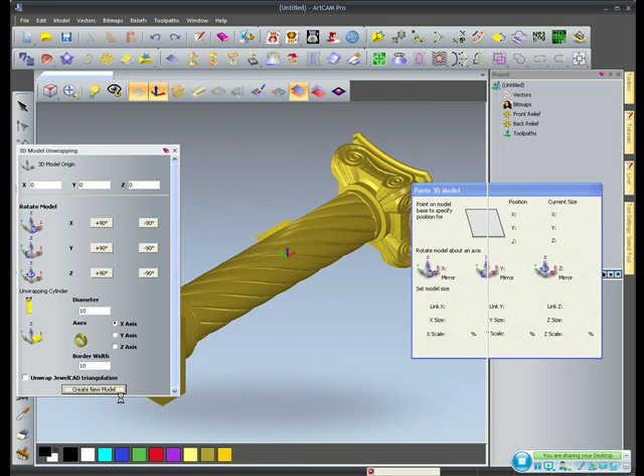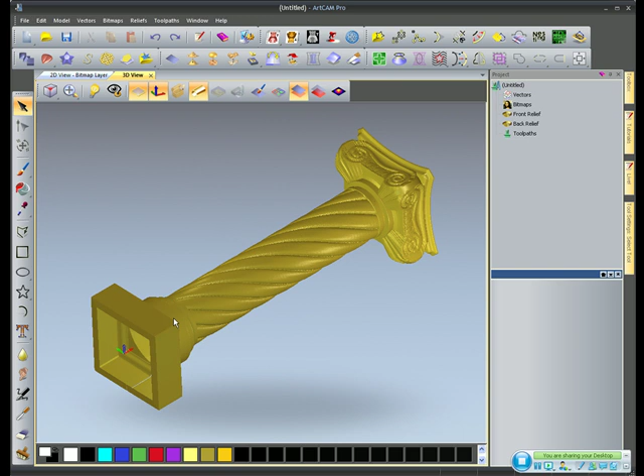What it's doing right now is opening up a brand new model at the size of the column. We're looking at the column unwrapped, as if it were sliced open and flattened out. It's very easy to quickly view it wrapped, and here we can see the wrapped column as an ArtCAM file, which is now editable and I can change it.

Now before setting up for machining, you might want to take a file like this and get customer approval. What we can do is set it up as we want to view it, and then we have some lights and materials that we can set up or change.

So I can choose to change how this part looks. What I can do inside of ArtCAM is change the different material types. There's all kinds of different metals, woods, and other materials as well, including a few marbles.

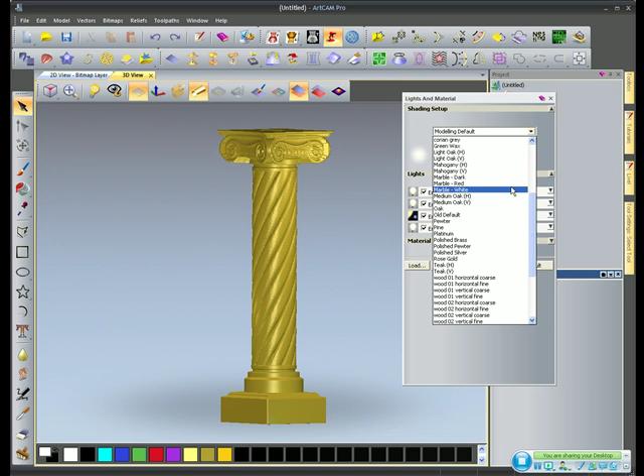For example, we have a red marble that we could set up. As you can see here, the red marble across this part. We also have a white marble.

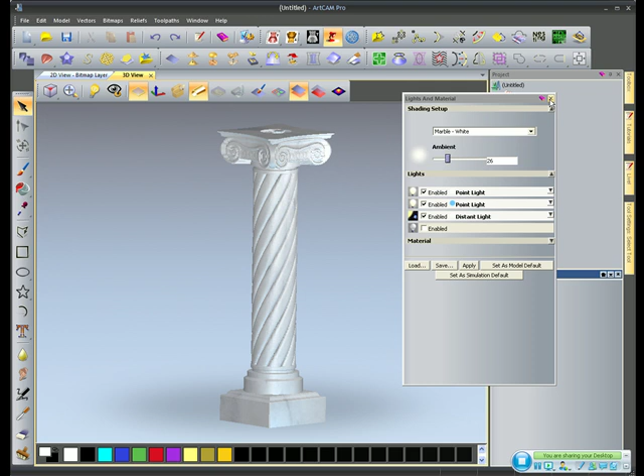Now say we want to leave it in the white marble. If you're happy with this look, and this is what the final product is going to look like, you can actually save this 3D piece exactly as we're looking at it right now as a JPEG, a bitmap, or a TIFF, so you can save it as a picture and send it to your customer for final approval before actually going through the machining process.

Another newer file type we can save out of ArtCAM is a 3D PDF. This is a fairly new file format given out by Adobe in the last year and a half or so. You can save this out as a meshed 3D PDF. Your customer can then open it, rotate it, and look at it from all angles, and zoom in and out. The nice thing is they can't alter or change the file, they can only look at it. So you can use this for approval before actually machining.

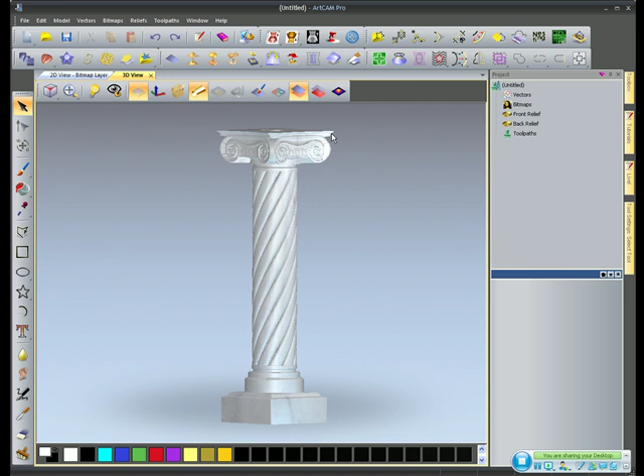So let's go ahead and look at the machining portion of this. As I said earlier, we're going to set this up for rotary axis, or 4th axis, machining.

Typically it's going to be set up like this on the machine, so it's laying horizontally, and you're going to have a spindle on either end holding the part in place. What happens is your tool comes straight down from the top, and as your part machines, the part actually will rotate small amounts at a time.

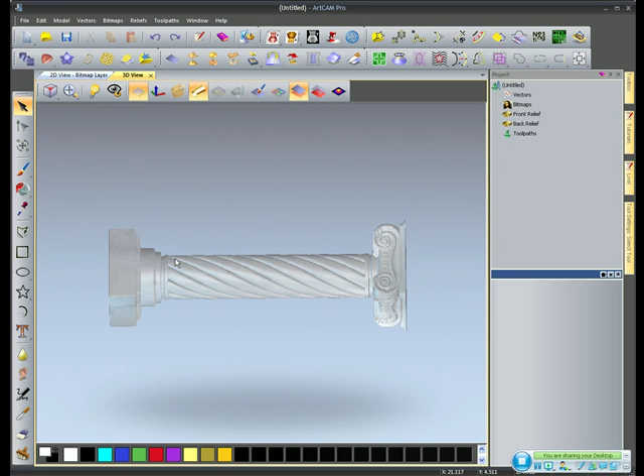So the tool will come straight down and go from one length all the way through to the other length, and then your part will rotate a small degree. And then the tool will come down again and cut the full length of the part. This is typically how you're going to set up your rotary machining. So let's set up that toolpath inside of ArtCAM.

ArtCAM's toolpaths are also fairly easy to set up. It's pretty much filling in the blanks. So I'm going to choose to machine here the entire model, the whole relief, set up a tolerance, and we need to choose a tool. We have an entire tool database to pick from. In this case, I'm going to select a fairly large ball nose. I'm going to select a 3/4 inch.

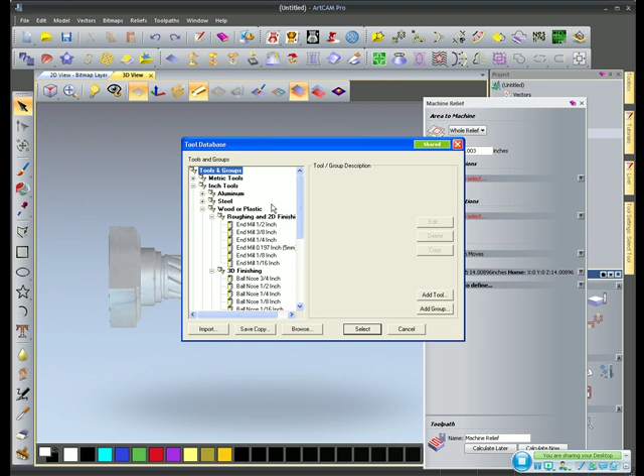The reason for that is this column is actually just about 8 feet tall, so this is a very large piece. So I want to use as big a ball nose as possible so I can speed up the machining time. I'm going to select my tool, and in here you set up everything the machine needs. So the machine would need to know the feed rate, plunge rate, spindle speed, step over, things like this. You set this all up inside of ArtCAM so that when you're done, you just send the file to the machine and the machine will cut it for you.

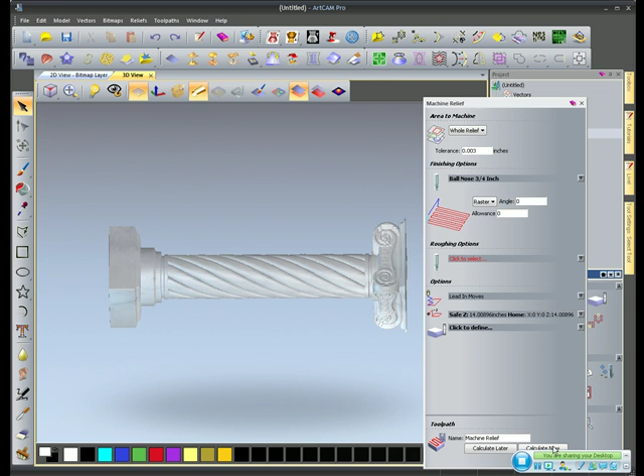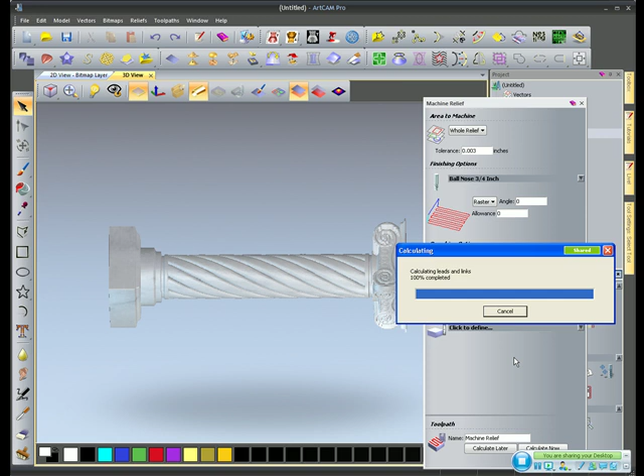Let's go ahead and calculate this toolpath. What it's going to do is wrap our toolpath around our relief. Now it just takes a few seconds to go through the calculation process, and we'll show you how you can quickly change and alter anything you need for this toolpath. So what it's calculated for us is wrapping this red, which is hard to see right now, it's one solid block, but it's really made of all small lines controlling our machine.

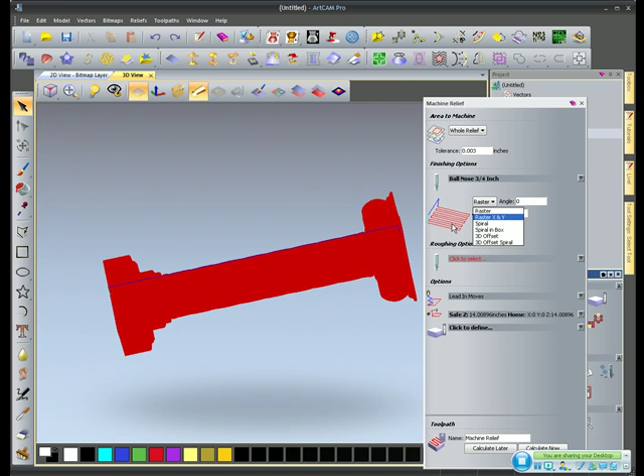Now currently this is machining side to side, and this would be probably pretty inefficient. And it's pretty easy to change in ArtCAM. You have multiple strategies. We have a raster, which shows in this picture going back and forth, so it's basically straight lines. We also have a spiral, which will work its way inwards. And another one are our 3D offsets. These go in a spiral pattern as well, but these are very advanced toolpaths that will take into consideration your whole surface, and as it goes up and down, it will bring your tool closer together to get more detail just in areas that it needs to.

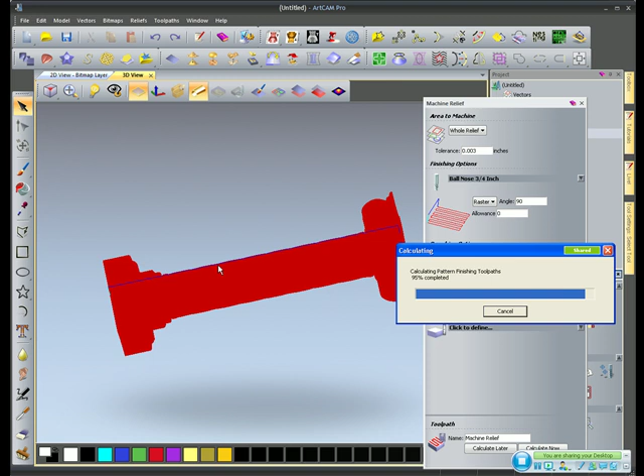Now in this case we are going to stick with the raster because this is going to be your fastest machining type. And we're going to change the angle to 90. What this is going to do is instead of going back and forth, it's going to give me nice long moves across the whole part, which will be faster for our machining time. So it just goes through a very quick recalculating process, in which case it takes that red toolpath again and forms it over the 3D relief.

Now if we take a closer look at the actual toolpath itself, these red lines that you see, this is what controls the machine. So these red lines that start moving up and down, this is what tells your CNC router to move up and down and cut out this part.

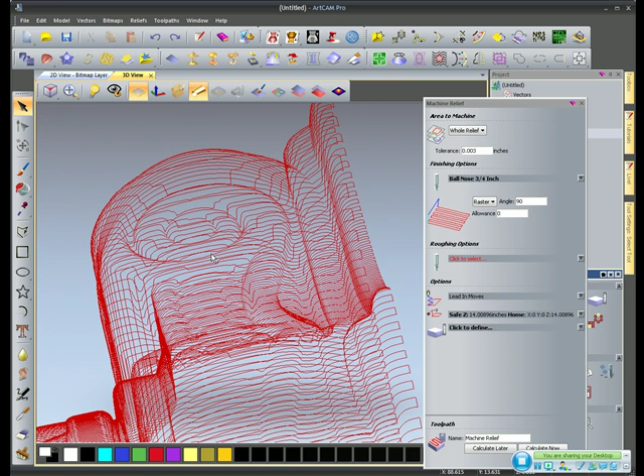So for this example, we've been able to see how to import a 3D model. It doesn't have to be a rotary model. It can be any type of 3D model, a flat model, a wrapped model, a full model. We've imported the 3D model and we've set it up for rotary machining.